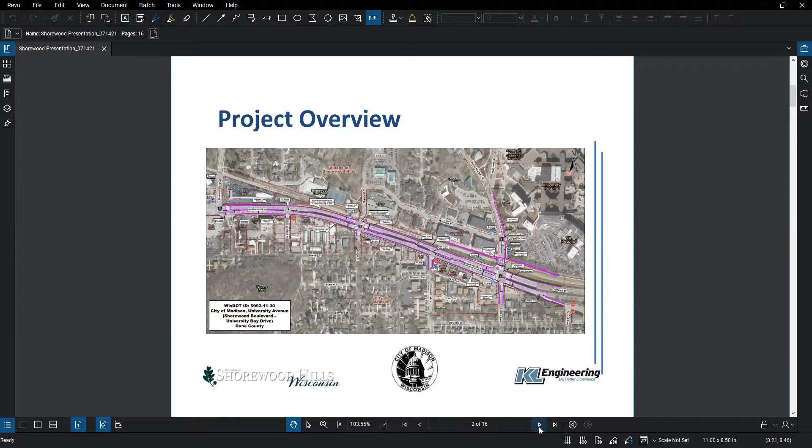As far as the new typical section for University Avenue, it'll consist of 3 lanes in each direction, separated by a median. There will be about a 7 to 8 foot sidewalk on the south side of the roadway and a new 5-foot sidewalk on the north side. Those sidewalks will extend the full length of the project from Shorewood Boulevard all the way to University Bay Drive.

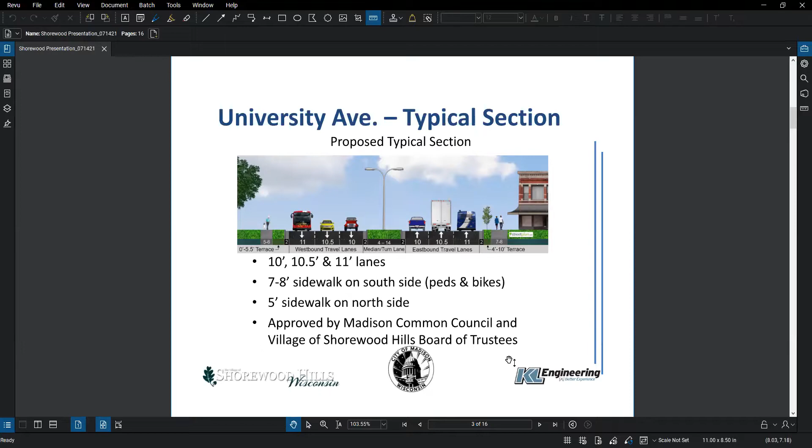Proposed improvements, these are the general proposed improvements. As far as pedestrian features, there will be new curb ramps that meet ADA requirements at all of the intersections. We will have a widened terrace on both sides to provide a little more green space and separation from traffic to the sidewalk. There will be that new sidewalk on the north side from University Bay Drive to Shorewood Boulevard, as mentioned earlier. We are doing continental crosswalk markings, the larger markings you can see on the screen here, for higher visibility to help promote safety for pedestrians crossing, so vehicles can see the crosswalk better.

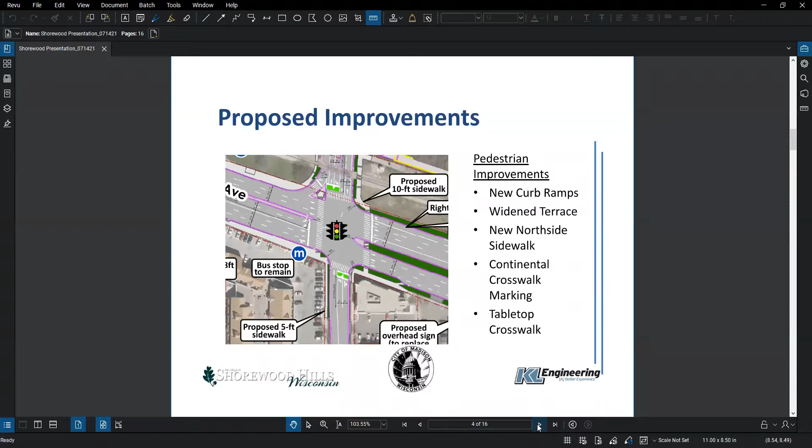There will also be a tabletop crosswalk at the University Bay Drive intersection, where we raise the crosswalk up to the curb line, just to promote safety there as well. So vehicles will have to slow down as they go over that crosswalk, and from a visibility standpoint, be able to see pedestrians crossing there better.

Continuing on with the improvements, some safety and operations. The intersections that currently have signals will get new signals.

The hill around Schmidt Place will be lowered as part of this project, just to promote a little more visibility and sight distance as you're approaching the intersections from each direction.

There will be a dual eastbound left turn lane at University Bay Drive, for eastbound traffic heading north onto University Bay Drive.

There will be leading pedestrian intervals at the signals. That means when a direction turns red, the pedestrian gets a go signal before another direction turns green, so pedestrians can get into the intersection before vehicles start moving, helping promote visibility and safety for pedestrians crossing there.

There will also be countdown timers at the intersections for pedestrians to let them know when the pedestrian movement may occur.

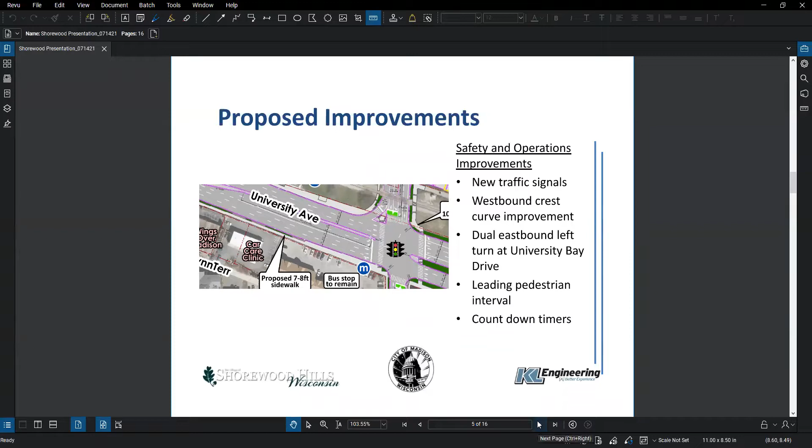On University Bay Drive itself, we will be reconstructing it from University Avenue to the Overlook Terrace/Marshall Court intersection, adding 2 new northbound lanes for that block, a northbound bicycle lane in that same stretch, and a shared lane on the southbound direction—widening it for more vehicle and bicycle accommodations.

There will be a new northbound bus pullout so buses can get out of traffic at the bus stop near the VA hospital, and we will be adding a 10-foot sidewalk on the east side of University Bay Drive from University Avenue up to Overlook Terrace.

We will be extending the sidewalk from Overlook Terrace all the way up to the Children's Hospital, where it currently ends, providing a full extension and connection on the east side of the roadway. We are also adding a new signal at that intersection.

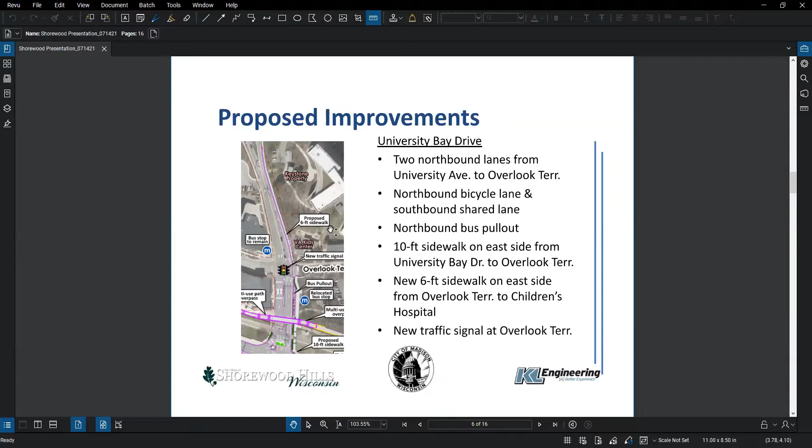Continuing proposed improvements, we're doing a pedestrian overpass over University Bay Drive. It will consist of a path along retaining walls for about half of it—shown here in yellow—while the other purple lines represent more of a bridge-style structure.

The middle span, just what's spanning over University Bay Drive, will be a prefabricated steel truss—one single span over University Bay Drive, with no piers or anything in the middle.

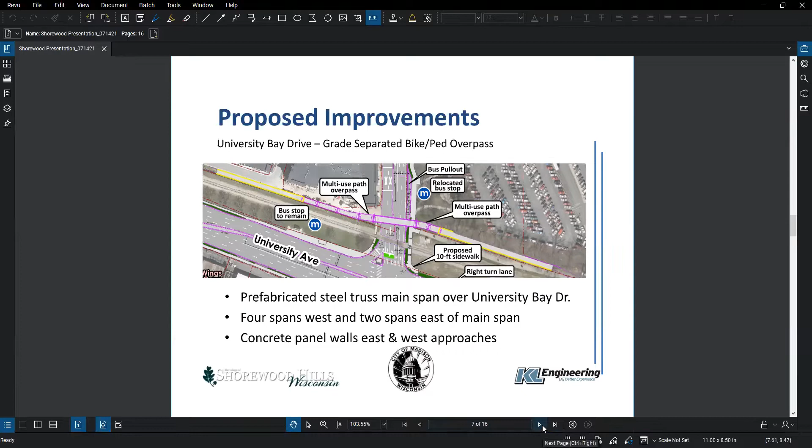Now, as far as the actual watershed—there was a watershed study completed for this area for the Willow Creek watershed. It was not part of this project, it was a separate study, but we did coordinate with them to improve the storm sewer as part of this project.

One thing from that study: we're going to install a 96-inch storm sewer all the way from Shorewood Boulevard to Grand Avenue to make that connection, allowing greater flow capacity and improving drainage in this area. That was part of the Willow Creek study.

As for the storm sewer pipes themselves, we'll be replacing all inlets and storm sewer along the project, to help promote drainage with the new lanes and the new configuration of University Bay Drive.

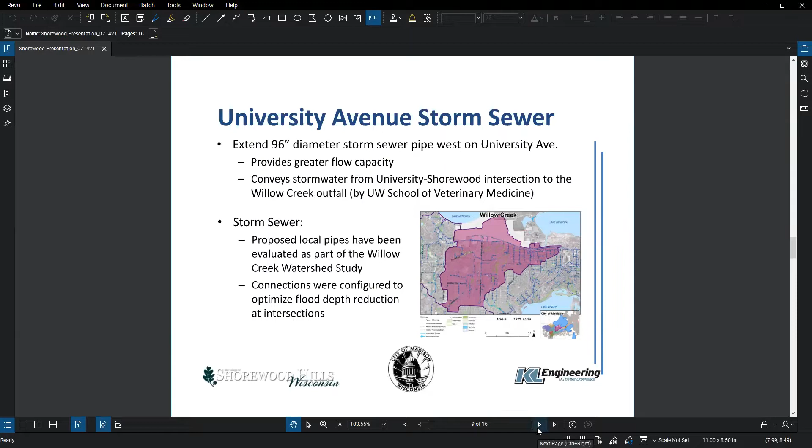Quickly going over the schedule: University Avenue is scheduled to start construction in the spring. We say winter/spring because we're looking at starting in March of 2022, and it will take pretty much the entire 2022 construction season.

To start off, crews will come in and remove the median, since we'll be maintaining 2 lanes of traffic in each direction at all times, requiring traffic to switch from one side to the other. The first stage is getting ready for that.

The second stage starts in the spring, when we shift all traffic to the south side of the roadway and reconstruct the north side. That will take spring into most of the summer of '22. Once that's completed, we'll do a little more median work.

Stage 2, doing the north side, will include the University Bay Drive construction, getting the 96-inch pipe in, any intersections on the north side including Marshall Court and a bit at Shorewood Boulevard, and also construction of the bike and pedestrian bridge over University Bay Drive.

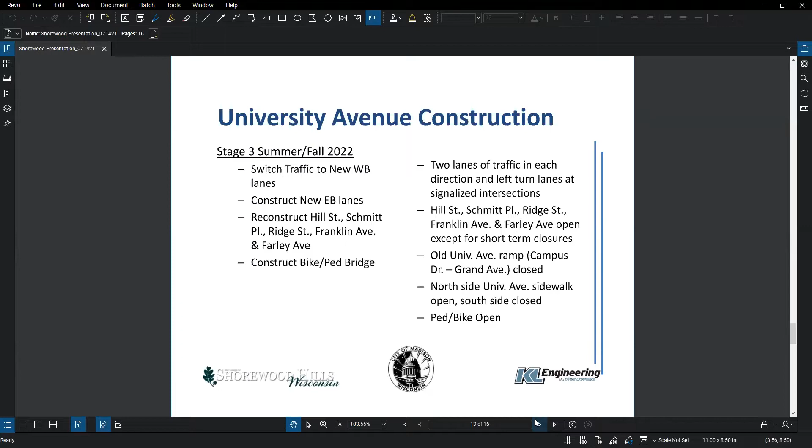What we're calling stage 3 is just we got to do a little median work before we reconstruct the other side. Then we get into what we're calling our stage 4. This is where traffic will be shifted to the north side of the roadway, which was already completed, so they'll be on all brand new pavement while reconstructing the whole south half of University Avenue for this stretch of the project.

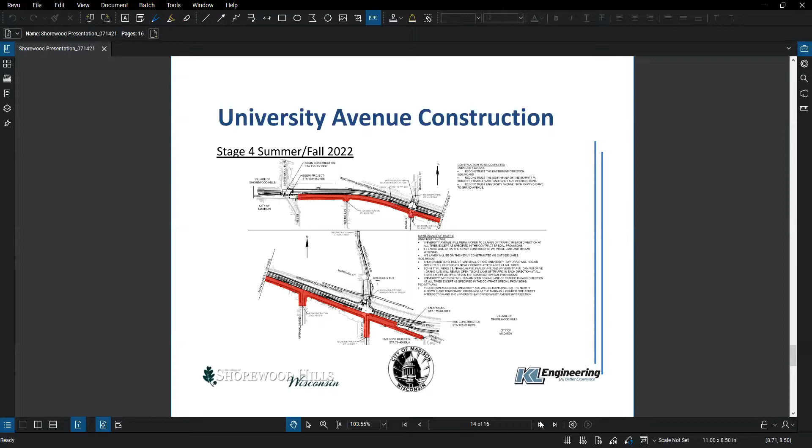Once that's done, we pretty much anticipate the fall of '22, and then we will switch traffic back to what their normal lanes will be. There will be a little bit of median work in between that, but it's anticipated to be done probably November of '22.

So a full construction season for this. We're looking at hours of operation of 7 to 7, and kind of 10 to 7 on the weekends. Otherwise, as far as driveway access, it will pretty much be mostly maintained. And if they do have to close one access, they'll be notifying all owners ahead of time for that work.

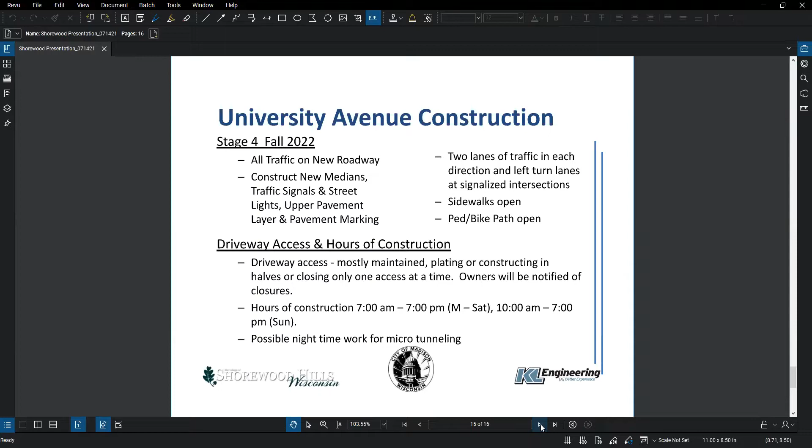And with that, I know that was just a quick 15-minute summary of a large project that's going to take a while. So I guess with that, we will open it up to any questions.

Questions of Brad? I can't see. There we go. Anybody have questions for Brad?

I have one, Brad. Do you have a sense of when this project will be bid out? Right now, I think they're scheduling it for a December let, so that's when it will be bid—probably early December is the current schedule.

Okay, and then do you have a timeline for when the bid will be awarded? Typically, since it's through the DOT process, it does take probably about a month to go through the approval process, verifying all the information. So I would anticipate early to mid-January is when that would actually be awarded.

Any questions of Brad? I have a question, Mary. Yeah, I'm sorry if this is something everybody knows, but I'm new to this committee. I'm just wondering what the main motivations are for this work—traffic patterns around the hospital, and or storm sewer related? Briefly, what is the motivation for this project?

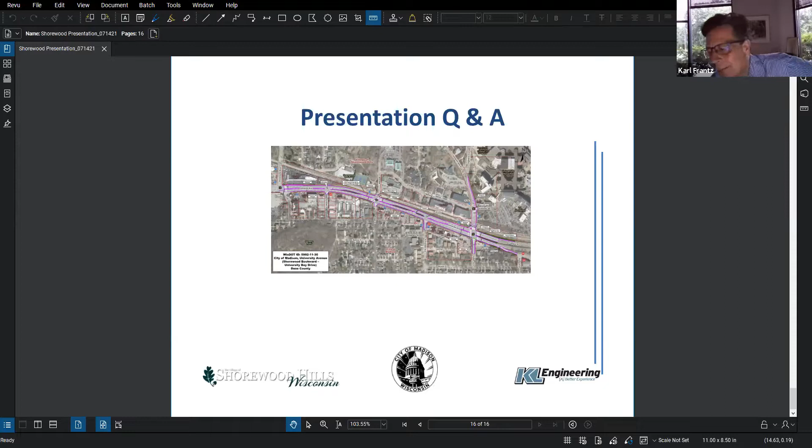So could I ask a little more - I probably wouldn't understand if you got into the engineering detail anyway, but when you say improving the hydraulics at Shorewood Boulevard, kind of what I understood from the progress meetings I attend each month, could you explain what that will entail to improve those hydraulics? Is it just changing how the pipes connect, or their angles of connection or something?

I think I can answer this, but it might be that Janet knows this better than I do, because she's been playing a bigger, more direct role in this project than I have of late. Janet, are you able to answer that? I think I know the answer, but I don't want to guess here. I forget the pipe sizing, and I should know this, but I actually do forget.

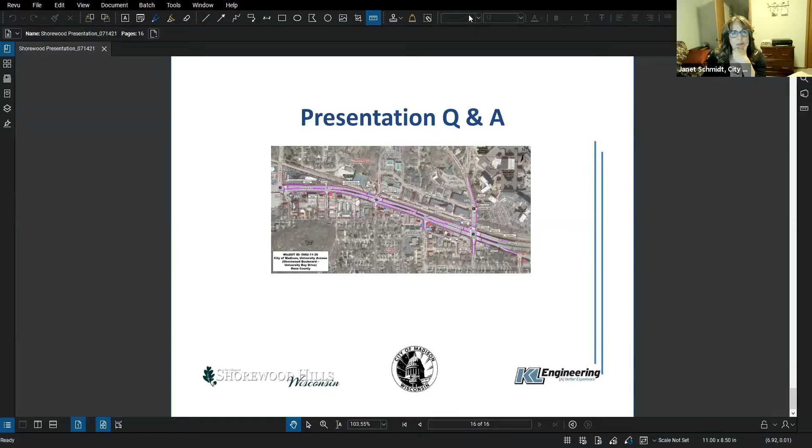Brad, do you recall, do you have a graphic of the intersection by chance? It would include upgrades to the T and how it all kind of comes together, and I believe it's adding box. But if Brad has something, I think it'd be easier just to show it. Yeah, if you give me one minute here, I will bring it up.

I asked the questions because I think the Stormwater Committee might be interested in that detail a little more. And I know it may not be totally figured out yet.

I'm pretty sure the answer is no, and I know they moved the location of the structure a little bit to the west, I believe, and changed the angle. So hopefully Brad will show that. Yep, is that what you're looking for?

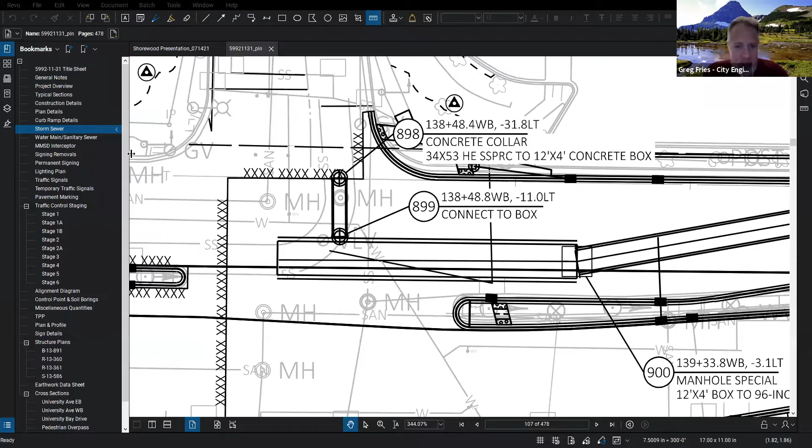Yes. So let's see, we're extending the existing box to the west, connecting to the existing box at the Shorewood intersection, extending that to the west, where we will connect to the new 96-inch storm sewer that will connect to the Grand Avenue that Greg was talking about earlier.

And there will be a connection from that new box. The current pipe takes a 90-degree bend here and then heads north on Shorewood Boulevard. Since we'll be extending this one to the west, we're making that connection with a new pipe from the new box up to the existing box at that location, to keep that continuity there.

So I don't know if there's anything else, yeah Greg or Janet, any other details you wanted to talk about?

I think the goal here is to allow the water to cross connect, but to use the 96. So what you're seeing at this, you see a number 899 in the middle of the screen that Brad has shared. That's a structure number for them. And so it's going to be a connection to the box.

What this is trying to do is push the water down the 96-inch unless there is backup pressure, and then it flows to the north. The way this system works right now is all the water flows to the north and connects to the box culvert in the back.

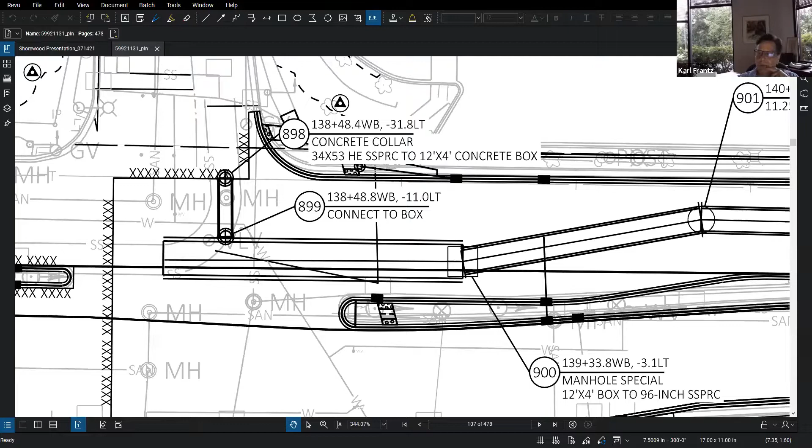That's correct. So when you look at this connection, in the light gray lines you see the sweeping turn that the existing system has - it's kind of drawn like a 90-degree elbow but it's got a curve to it, some type of radius. And now you look at it and it's a T - so it is a true T.

Water, generally speaking, has momentum - it wants to go in the direction it's already going. So I'm not saying no water will go north, but what will happen is the only reason water at this point would go north is if the 96-inch is fully pressurized and flowing above full capacity, and basically the water at that T intersection has essentially stagnated. Then water is going to start looking for a place to go.

Now, if the box is also stagnated at that time - say we have the 2018 event again, knock on wood, hopefully not ever - but if both systems are already at capacity, what's really going to happen is the water is going to come out of the inlets and flood. That doesn't change, because Shorewood Boulevard is the lowest spot on this system. There's nothing - except another glacier - that's going to change that fact. So that won't change in those large events that exceed the pipe capacity.

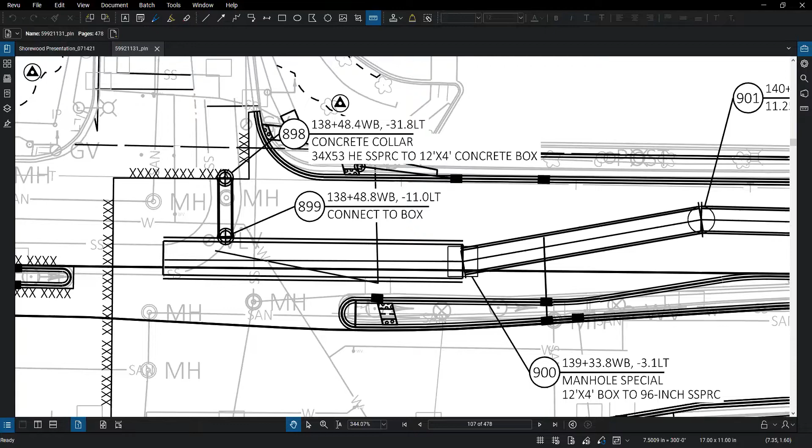Give me one second here, I've got a table to pull up so I don't want to misquote this. It varies a little bit along the system, but right now the existing 6x15 box - it varies along its length, but averaging it because the slopes change and capacity changes a little with the slope - the low end is 530 cubic feet per second capacity, and the high end is about 700 and change.